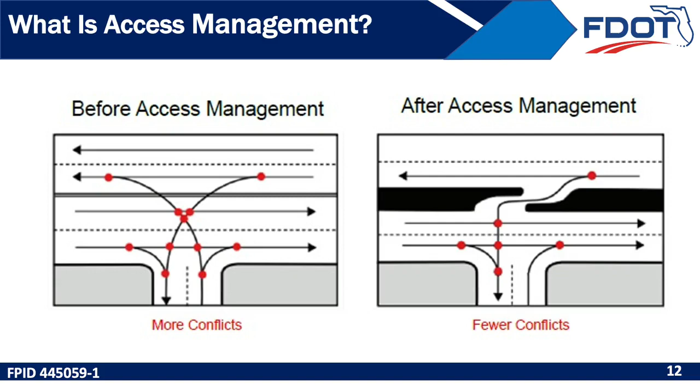The project area is approximately 5 miles along River Road, starting south of I-75 and extending south to US 41. The project will be built within a mostly rural, natural area with RV parks and growing residential developments.

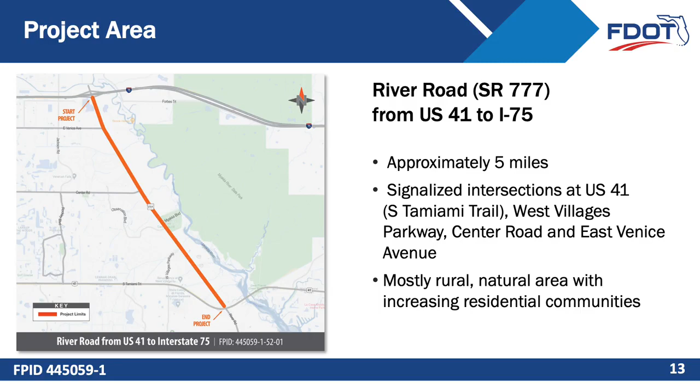The project area on River Road is a 2-lane undivided roadway with a posted speed of 45 miles per hour. River Road is an evacuation route for Englewood, North Port, and Venice. Natural destinations along the corridor include Myakka River State Park, Jelks Preserve, and Blue Heron Park. The I-75 interchange is just north of the northern project limits.

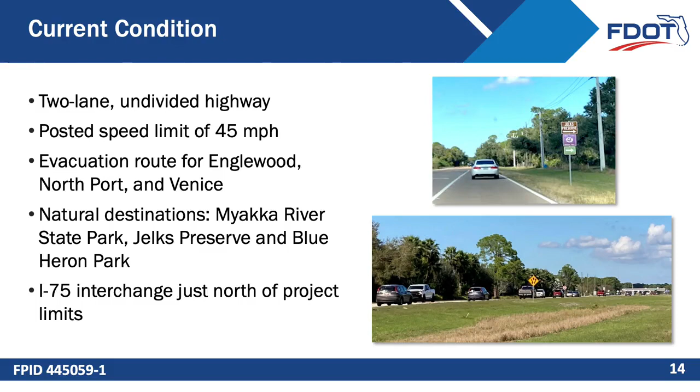This design-build project will widen River Road to 6 lanes from US 41 to Center Road, and to 4 lanes from Center Road to I-75. The project will enhance safety by installing a raised grass median, streetlights, and alighting areas or concrete pads to accommodate boarding buses. The speed limit will remain 45 miles per hour.

This exhibit shows the proposed project from US 41 to north of Myakka Boulevard and Grand Palm.

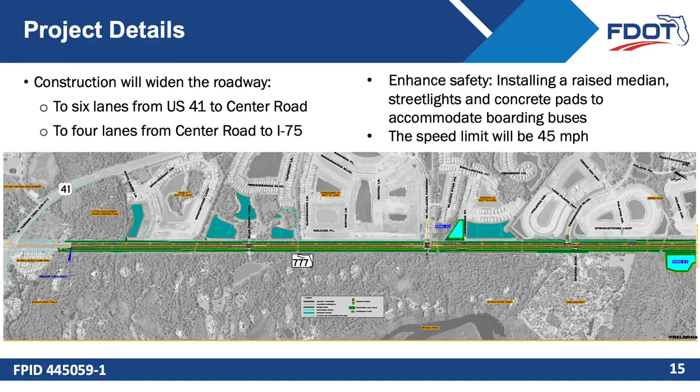The project includes improving multimodal access along this corridor. A 10-foot wide shared-use path will be built on both sides of River Road, improving bicyclist and pedestrian safety and enhancing access to the various publicly owned lands.

Work will include installing culverts that will allow animals to pass safely under the roadway in 2 locations. A project development and environmental study was conducted to examine environmental impacts. Environmental permitting and mitigation determinations have been completed.

This exhibit shows the project area from Grand Palm to the northern project limits near I-75.

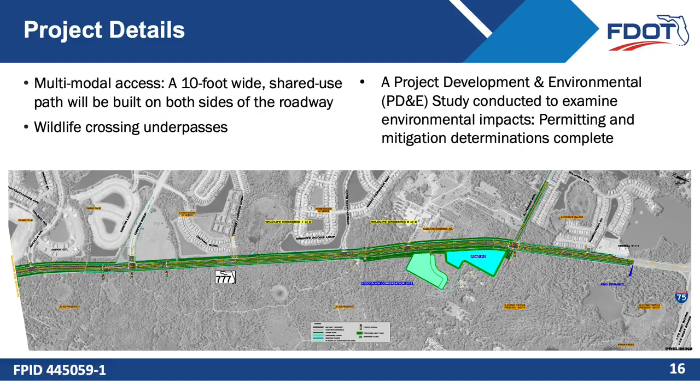The typical section exhibits indicate where River Road will be widened to either 4 lanes or 6 lanes. The shared, multi-use path will be built along both sides of the corridor and street lighting will be installed. Enhanced pavement markings will include the speed limit in several areas.

The renderings show potential opportunities for future landscaping. Trees and plants shown are only conceptual. A separate landscaping project may be completed at a future date after the completion of this design-build project.

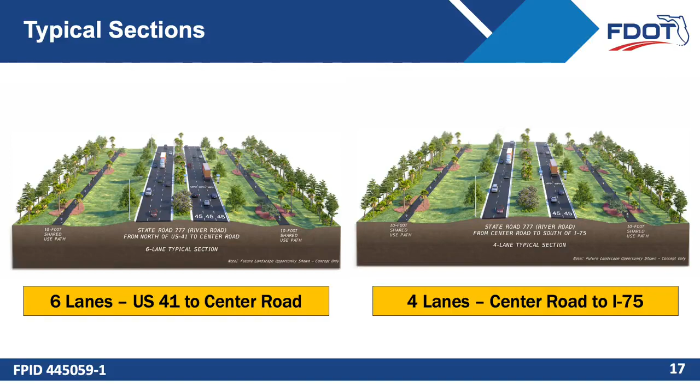Based on wildlife travel patterns determined during environmental studies, 2 wildlife crossing underpasses will be built. The culverts built under the roadway will allow animals to pass safely under traffic in 2 locations. The wildlife crossings will be located north of Tempest Harbor Loop at Station 683, shown on the project exhibits, and north of Stoneycreek Boulevard near Station 686 on the exhibits.

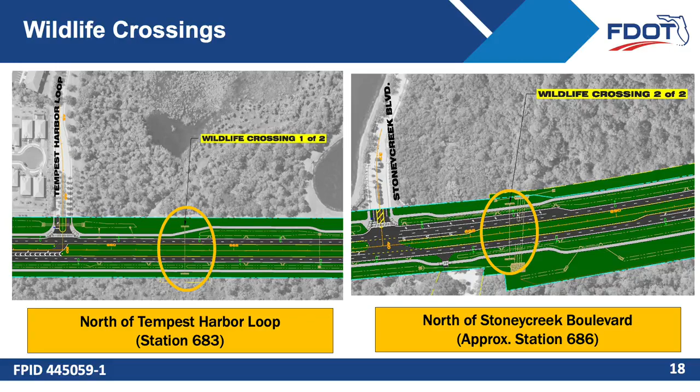Let's take a closer look at the improvements planned as part of the design-build project. From US 41 to north of Blue Heron Park, the roadway will be widened to 6 lanes.

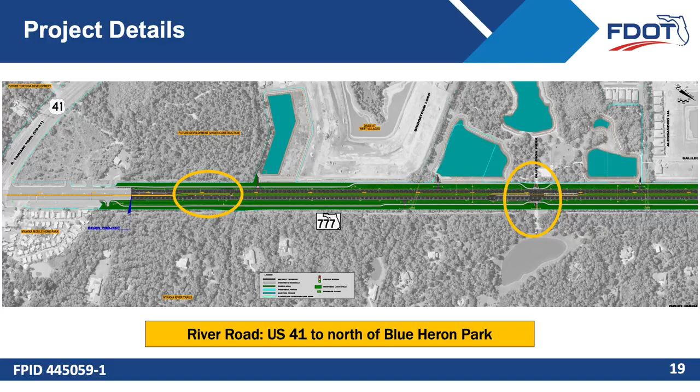The 6-lane widening continues past the Renaissance at West Villages, the Preserve at West Villages, and Grand Palm. A bidirectional median opening will allow northbound vehicles to turn left onto Observation Boulevard and southbound vehicles to turn left onto Myakka Boulevard. A northbound right turn lane also is being built to access Myakka Boulevard.

An additional directional median opening will be located north of this area to accommodate U-turns. Additional widened pavement, or a bulb out, will be placed to the right of the southbound lanes to accommodate this movement.

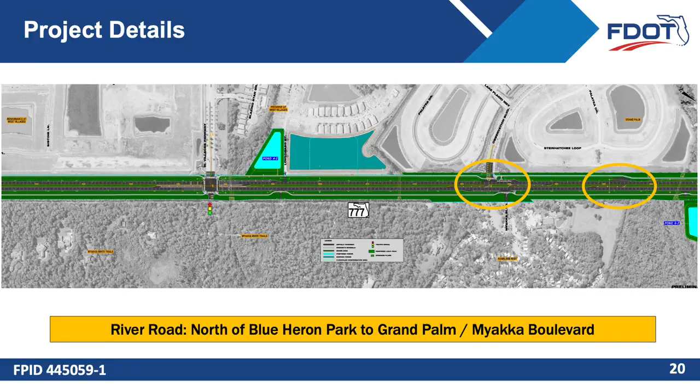A full median opening is planned at Aucilla Drive. The 6-lane widening continues past the rest of Grand Palm and Stony Brook of Venice to Center Road. A directional median opening is planned to allow northbound vehicles to turn left onto Tempest Harbor Loop.

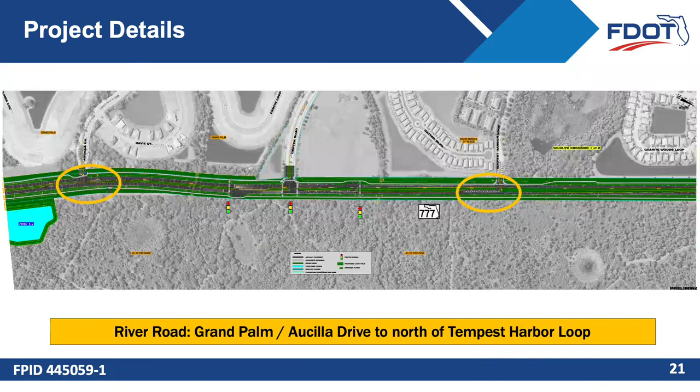To enhance safety, changes are being made in the area of Center Road to reduce the number of conflict points for vehicles and potential crashes related to turn movements.

A directional median opening in the Center Road intersection will create a partial median U-turn. Vehicles exiting Center Road will be able to turn right or left onto River Road at the signalized intersection.

Northbound vehicles wishing to access Center Road will proceed through the intersection to a signalized directional median opening about 700 feet to the north to make a U-turn. Pavement along the southbound lanes will be widened in this location to facilitate the U-turns. This movement will be protected by an arrow for U-turns on the traffic signal.

These vehicles will then be able to make a right turn onto Center Road. The signal in this location will also provide another protected location for pedestrians using the trail to cross River Road.

Southbound vehicles wishing to make a U-turn will be able to do so about 600 feet south of Center Road at a signalized intersection. This movement will be protected by an arrow for U-turns on the traffic signal. This traffic signal will provide another opportunity for pedestrians and bicyclists to cross to and from the shared use path.

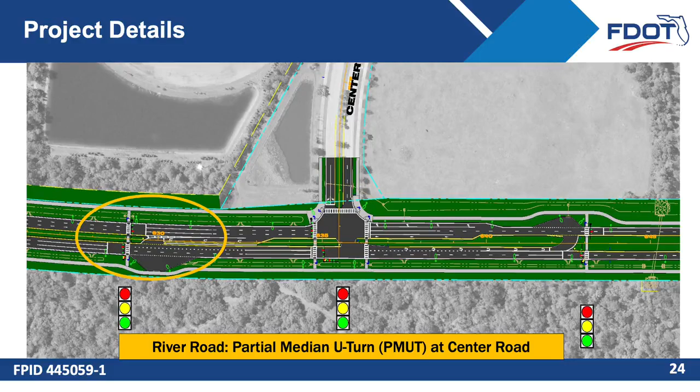According to the Federal Highway Administration, conventional intersections typically have 32 conflict points where vehicles could potentially crash. In intersections using median U-turns, the potential is reduced to 16. National studies show the total number of crashes is reduced by 20 to 50% because of this. Moreover, the number of head-on and angle crashes that have a high risk of injury is lower for these types of intersections. Also, pedestrians are exposed to fewer conflicts with vehicles, improving safety.

Fewer signal phases at the median U-turn intersection increases the number of vehicles that can get through the intersection by 20 to 50%. While there is additional travel distance for those making left turns at these types of intersections, the total travel time savings usually outweighs the time from the additional distance traveled.

Partial median U-turns, where the left turns from the cross street are maintained at the intersection, or similar concepts, have appeared in Florida, New Mexico, and Louisiana. FDOT has used or proposed partial median U-turns at US 41 and Pine Island Road in Lee County, US 27 at California Boulevard in Polk County, and at US 92 at Tomoka Farms Road in Volusia County.

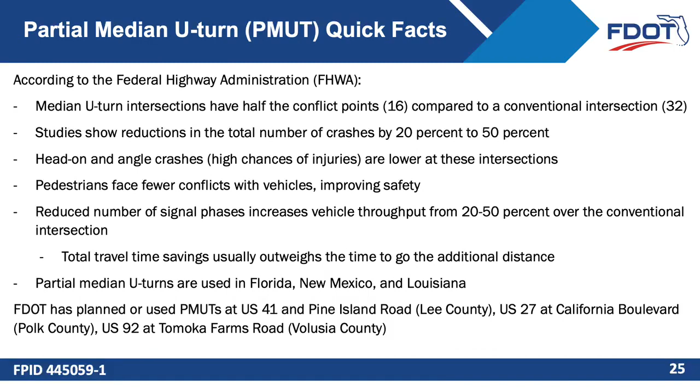The 4-lane widening continues from Center Road to the north end of the project. Full median openings are planned at Stoneycreek Boulevard and Hazeltine Nurseries.

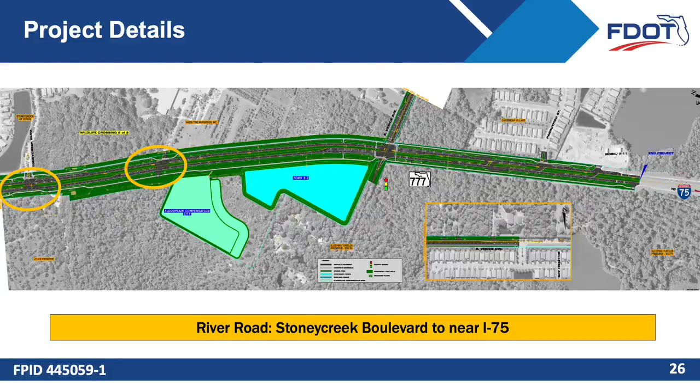Just south of Venice Avenue are examples of the alighting and boarding areas, concrete pads connected to the trail to accommodate boarding buses, shown in the oval spot. Streetlights will be installed along the entire corridor. They're highlighted in the yellow squares on the exhibit as an example.

Venice Avenue will be widened for several hundred feet as part of this project, as noted on the main exhibit as well as on the inset image.

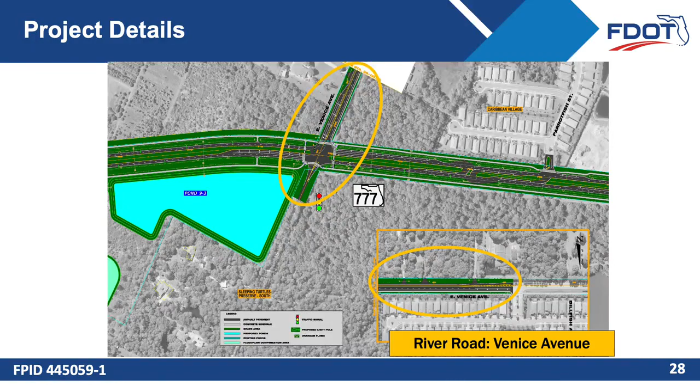North of Venice Avenue, a bidirectional median opening will allow U-turns for both northbound and southbound travelers. Pavement will be wider on the outside of the lanes in both directions in this location to facilitate the U-turns. Farther north, a directional median opening will allow northbound vehicles to turn left onto Parrotfish Street to get into the Caribbean Village. A final directional median opening will allow northbound vehicles to turn left into the gas station.

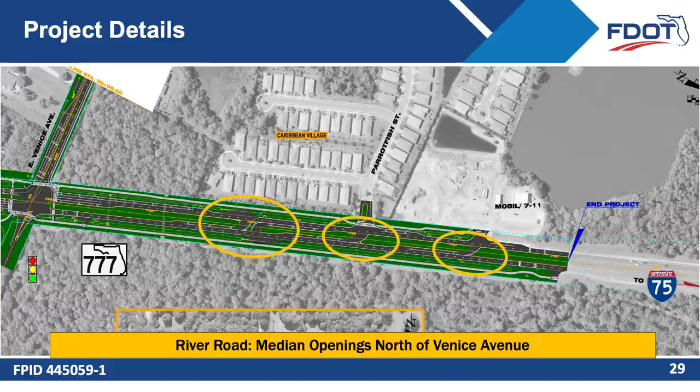The design portion of this design-build project began in mid-2021. The design phase is anticipated to finish in early 2022. Construction is expected to begin in February 2022. Work is anticipated to finish in early 2025. Please be advised that construction schedules are subject to change due to a host of variables and unexpected conditions. The estimated construction cost is $47.5 million.

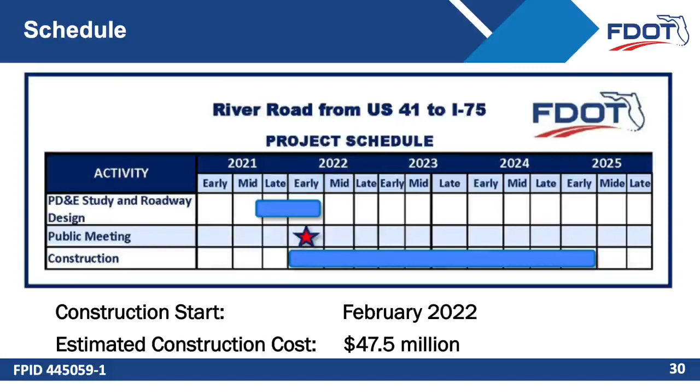Once construction begins, the department will keep at least one lane open at all times. Initial construction activities will include setting up safety devices and mobilizing construction equipment, clearing and grubbing, placing temporary asphalt, excavating ponds, and embankment work.

Private property owners are advised to remove landscaping, signs, irrigation, and other amenities from the state right-of-way prior to construction to avoid damage. FDOT is not responsible for damage to private items on the state right-of-way. Drivers should expect lane closures, which may cause some delays. Access to all businesses and residences will be maintained.

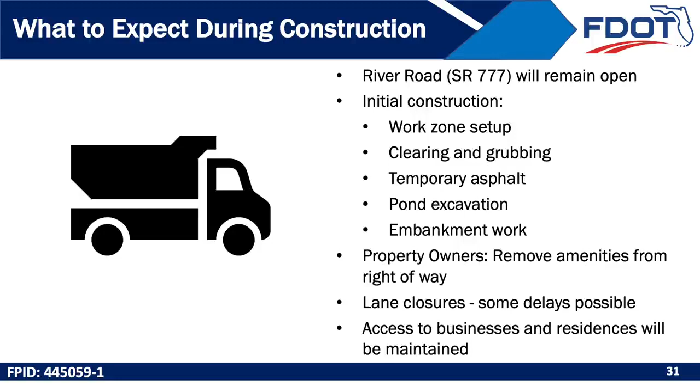To minimize construction impacts on the community and traveling public, Phase 1 of the construction will take place on the opposite side of the state right-of-way from the existing travel lanes. Crews first will build the new southbound River Road lanes and shared use path during this phase. Work in this phase could take 14 to 18 months. Please keep in mind that construction schedules are subject to change due to a host of variables and unexpected conditions.

During Phase 2, traffic will move onto the newly built southbound lanes. The area of the previous existing lanes will be rebuilt to house the new northbound lanes and shared use path. This phase also could take up to 14 to 18 months. Once the new northbound lanes are completed, crews will work to build the median area. Again, keep in mind that construction schedules are subject to change due to a host of variables and unexpected conditions.